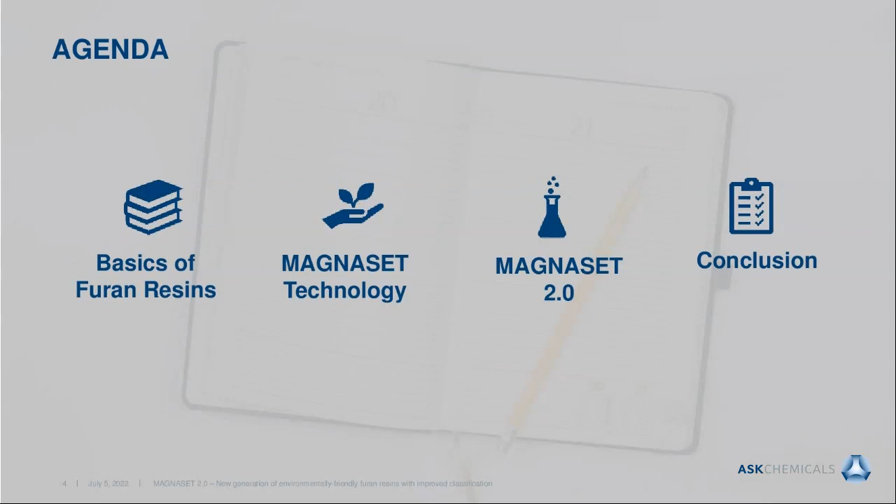Finally, the conclusion should convince you that the MAGNASET technology is an effective and powerful tool to significantly improve sustainability and work conditions. So let's jump right in. What is the no-bake binder concept?

The basic idea of this concept was the foundry's need for a dimensionally accurate binder system that did not require heat to set, to cut down on expenses and process steps and to save money. In general, the no-bake portfolio covers a wide range of different binder systems, which have been extensively studied in the past. This includes probably the most commonly used no-bake binder systems, such as furan, phenolic urethane, or alkaline phenolics, but also phenolic and alkyd oil binder systems are well known.

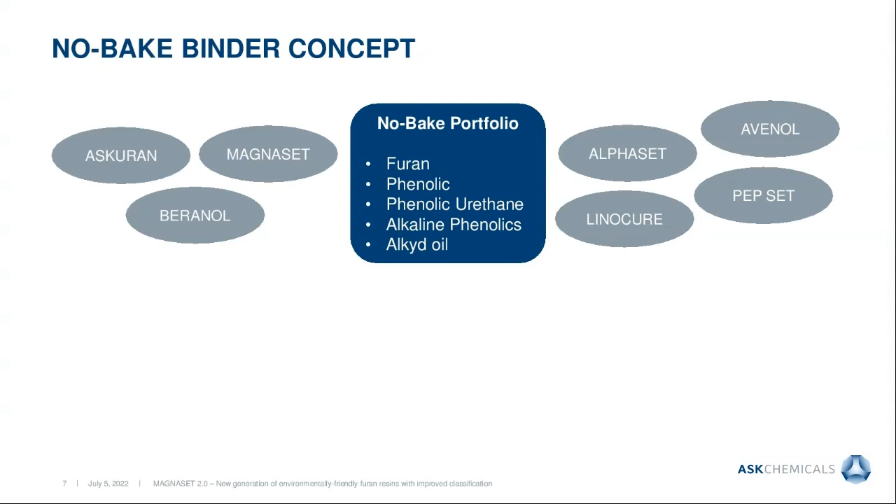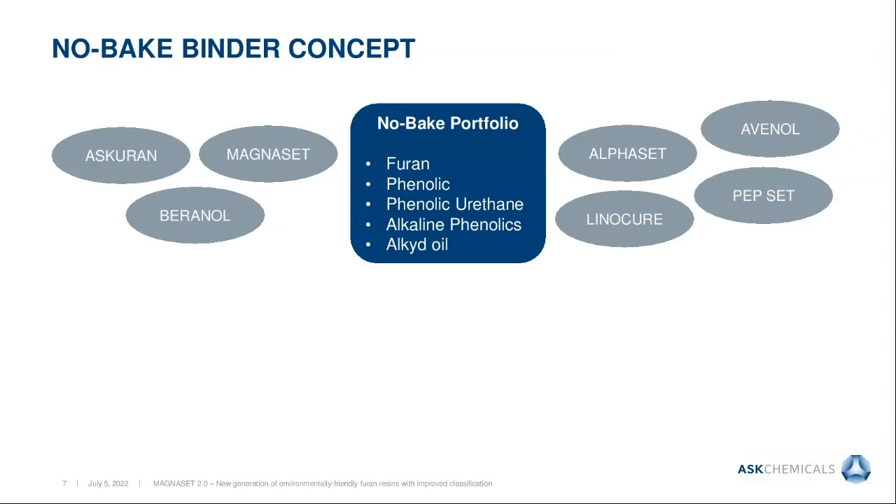ASK Chemicals has a strong background in no-bake chemistry and a huge variety of products in their portfolio, such as their well-known PEPSET binder system as an example for phenolic urethane systems, or ASKURAN as their signature furan-based product, just to give you some names and a few examples. And what do all of these systems have in common?

They are all organic systems, which means that emissions, including BTX and overall emissions, play a crucial role, and these emissions are strictly regulated by the government. Additionally, toxic raw materials such as formaldehyde, phenol, and furfuryl alcohol, which are used as building blocks, are regulated and strict threshold values are given. This affects the classification as well as the safety data sheets, and it also plays an important role affecting transport, storage, and handling of these resins. For example, the amount of residual free formaldehyde must not exceed 0.1%.

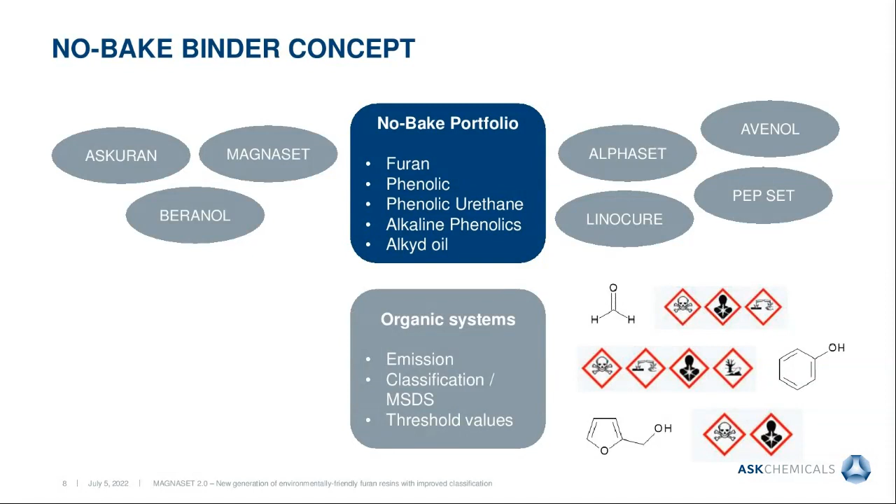For the different resins, different curing mechanisms are known, for example ester curing, isocyanate curing, or acid curing, which means that also a hardener as part 2 is needed. The respective binder hardener system and the corresponding organic structure of the hardener and the emissions resulting thereof have also been taken into account. Furthermore, if you have a hardener which features sulfur or phosphorus, this can cause casting defects which you have to take into consideration. Today, we will concentrate on acid curing systems, which includes the ASK product classes ASKURAN and MAGNASET.

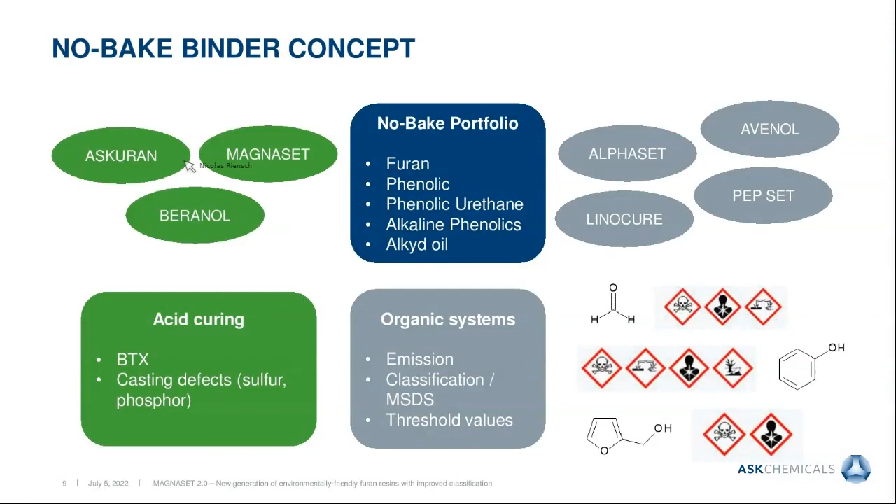In contrast to systems based on petrochemical components such as phenolic urethane or ester curing phenolic systems, furan binders are based on furfuryl alcohol, which is a readily available renewable raw material derived from agricultural waste such as corn husk or rice hulls. Due to the self-curing ability of furfuryl alcohol under acidic conditions at ambient temperature, furan binders can be described as the first true no-bake binder.

So let's take a closer look at the mechanism. The addition of the acid initiates the polymerization reaction, which proceeds under chain growth and cross-linking. The starting point of the polymerization reaction is between two furfuryl alcohol monomers to build up condensation product 1, which has a methylene bridge and still features a reactive methylol group, shown here in the orange box. Further condensation affords the suggested furan no-bake polymer 2.

In general, furan no-bake binders purely based on furfuryl alcohol show good performance in terms of environmental acceptability. But on the other hand, the produced sand cores and molds indicate a higher tendency to crack and break during casting and handling due to a lack of flexibility.

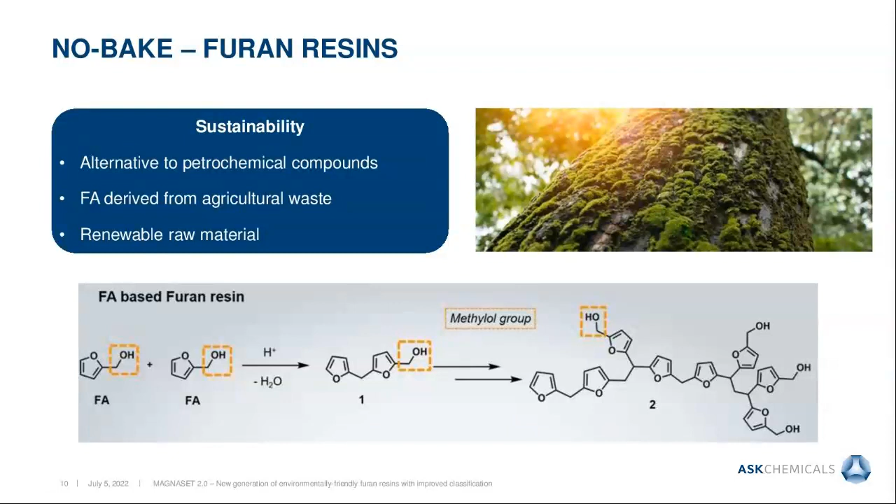The reaction scheme you can see on this slide would proceed on sand when we are combining pure furfuryl alcohol with a PTSA-based hardener, for example, under acid curing. The new furan technology, meaning ASKURAN and MAGNASET, describes modified furan resins, which can contain furan urea, furan phenolic, or in general mixed resins, as well as other additives and flexibilizers.

So now I've mentioned MAGNASET quite often, but what exactly is the MAGNASET technology? The background of the development of this technology are some of the main challenges that foundries are currently facing.

Strict environmental regulations defining emission thresholds while maintaining excellent casting quality. And of course, skyrocketing raw material prices, as well as increasing energy prices, gas prices, and delivery are also a big issue. But it is necessary to maintain the high level of performance while at the same time adjusting the resin recipes to fit the permitted threshold values.

And in this context, MAGNASET enters the stage. While conventional furan resins have a free furfuryl alcohol content of typically 50 to 95%, the MAGNASET technology is a new generation of low free furfuryl alcohol furan binder systems with a performance similar to state-of-the-art furan binders.

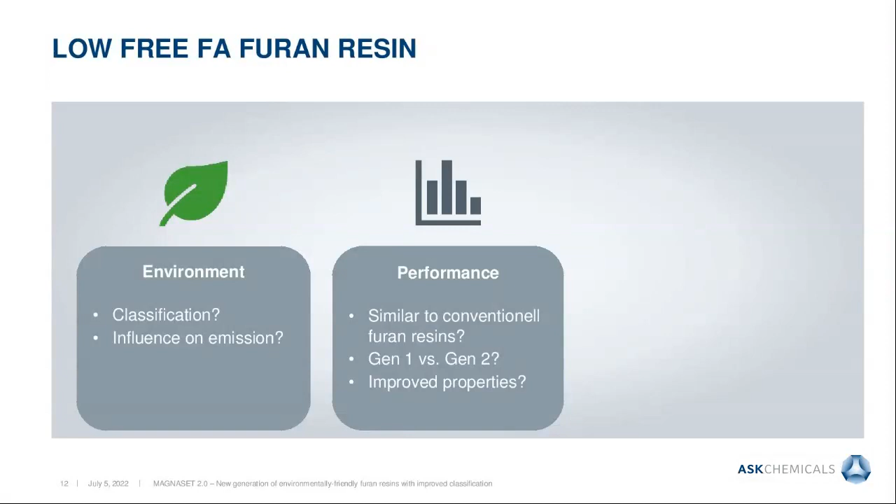On the following slides, I will talk about environmental aspects and answer the question how MAGNASET is classified and which influence on emission is given. Furthermore, comparison between conventional furan resins and the MAGNASET technology are made, also discussing results and performance of the freshly developed second MAGNASET generation. In the end, I will briefly talk about 2 case studies.

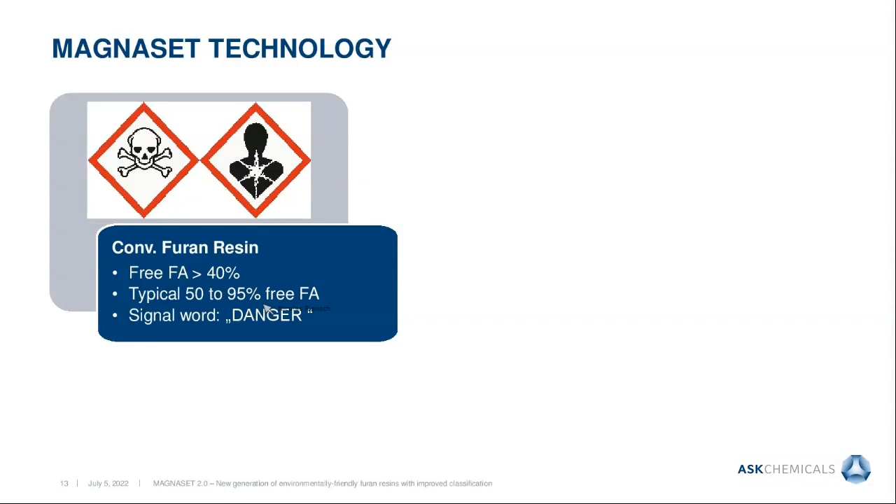So let's start with the labeling. As briefly mentioned, conventional furan resins have a free furfuryl alcohol content of more than 40%, mostly between 50 and 95%, resulting in a signal word danger and the labeling with skull and crossbone. For MAGNASET resins, the free furfuryl alcohol content is fixed to below 40% by definition.

And this reduction of the FA content leads to a milder classification, which you can see on the right side. The signal word changes from danger to warning, and the hazard symbols are now skull and crossbone free.

The basic idea is that the MAGNASET resins have an equal performance to the conventional furan resins, despite having a significantly lower free furfuryl alcohol content. And this again affects transport and handling and offers an emission reduction potential.

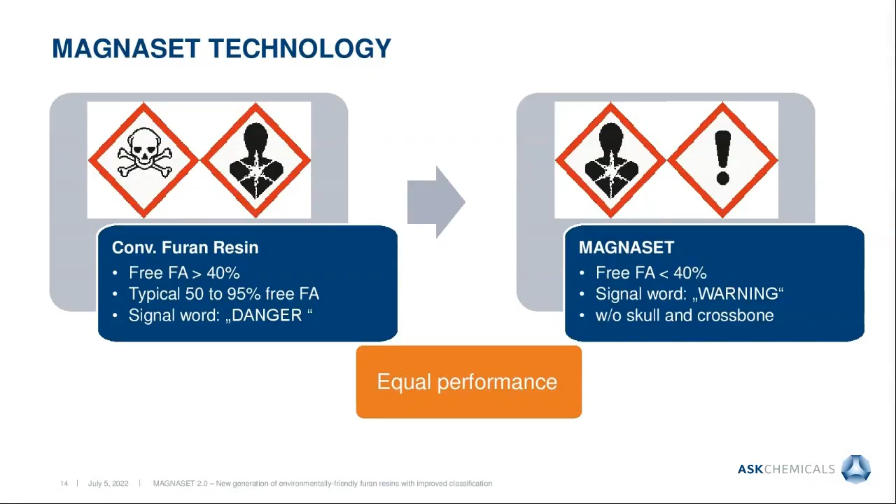So let's take a closer look at the hazard labeling. On this slide, you can see the classification of acute toxicity of category 4, 3, and 2, and the corresponding hazard symbols and threshold values.

Category 4, which is the lowest category of toxicity, is labeled without skull and crossbone, and this is the case for all MAGNASET resins. For the classification of the toxicity, you need the acute toxicity estimate values, the ATE values, or you can relate on the LD50 values given in this example for oral, dermal, or inhalative exposure.

You can find such values in Chapter 11 of the safety data sheets, and those values are determined or calculated for every resin, so also for all MAGNASET resins. And these values can be used to define the FA threshold values in the mixture.

In general, both LD50 and ATE values are used to categorize the resin into the toxic categories. And considering the correlation of toxic category for all exposure classes with the free FA content, you have to orientate at the lowest given value to get the mildest classification. So in this case, it's below 40%.

In category 4, the hazard statements are harmful if swallowed, in contact with skin, or if inhaled. And these phrases change to the phrase toxic when the FA concentration is above the threshold value of 40%, which you can see here. So these sentences are for category 3 resin.

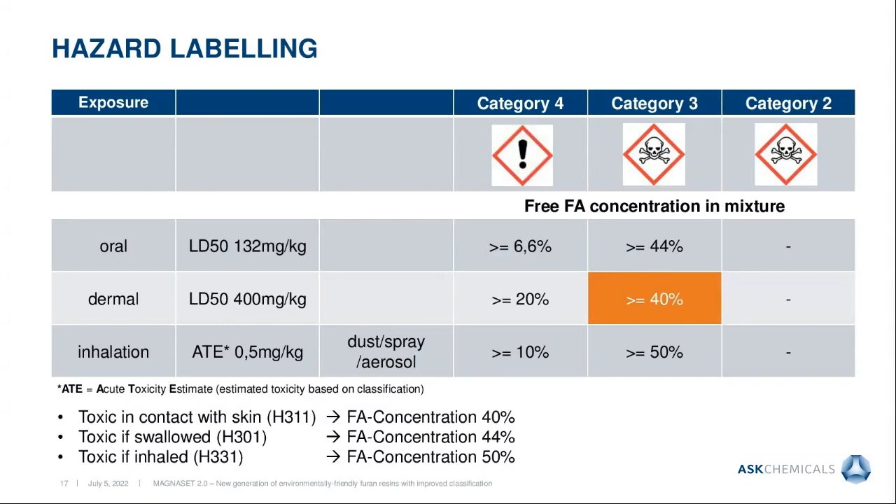In comparison to conventional furan resins, MAGNASET has a milder classification without the skull and crossbone symbol.

But what about emissions? First, we have to think about at which steps during the whole foundry process emissions can occur. On one hand, we have emissions as a result of evaporation and reaction products, including alcohol, formaldehyde, and other volatile organic compounds, which predominantly occur during mixing, forming, and storage.

They use binder, hardener, and sand. There's a difference between fresh sand and reclaimed sand, which play an important role during mixing and forming.

On the other hand, we have emissions as a result of pyrolysis and decomposition, which includes BTX, NOx, and SOx emissions, as well as phenol and formaldehyde, which occur during casting, cooling, and removal of the cast.

In general, the left side relates more to worker health and directly affects the workers in contact with the volatile organic compounds, while the right side also includes emissions for the environment and direct neighborhood.

Another important aspect for worker safety and emission detection is whether sufficient extraction of emissions is given—for example, if the mixing and forming process is connected to an exhaust line. In all cases, a sufficient extraction and purification unit should be used.

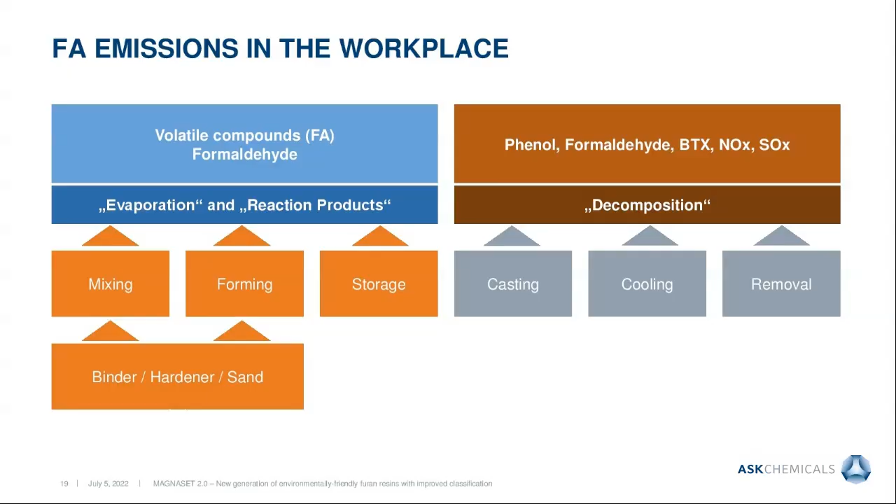During mixing and forming, the binder, hardener, and sand used are responsible for emission formation. Concerning our MAGNASET resins, we have a calculated, significantly reduced amount of volatile free furfuryl alcohol compared to conventional furan resins.

If we compare a conventional furan resin having up to 85% free furfuryl alcohol with our MAGNASET resin at just below 40% free furfuryl alcohol, we have an emission reduction potential of up to 55%, using the same hardener and sand, with MAGNASET as a direct drop-in replacement.

However, this value also depends on environmental conditions, including whether the molding line is connected to an exhaust line, or the state of the ventilation system and change of air.

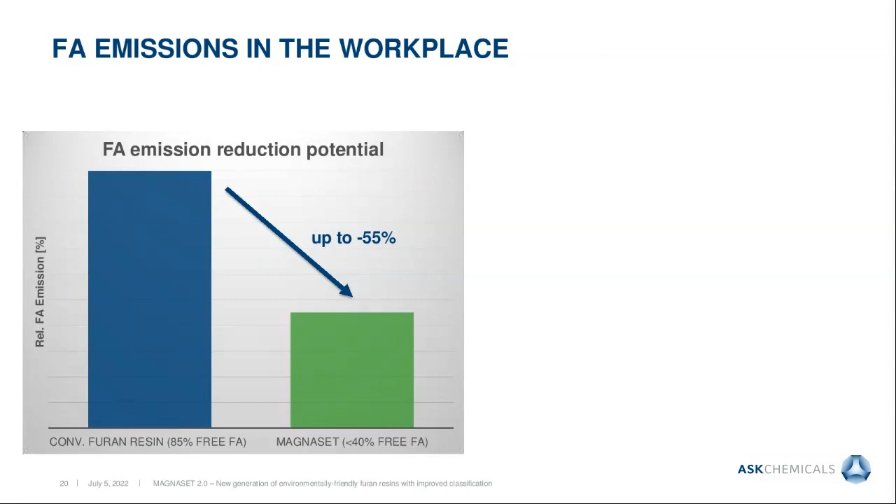Furthermore, we investigated the occurring formaldehyde emissions during mixing via photometric analysis under lab conditions, comparing conventional furan resins with resins based on the first and second MAGNASET generations.

To our delight, we found we were able to reduce the amount of occurring formaldehyde emissions during mixing by 39% when changing from conventional furan resins to the MAGNASET Gen 1 resin.

More recent results have shown that our freshly developed MAGNASET Generation 2 resin has the potential to further lower formaldehyde emissions by up to 64% in total, again compared to the conventional furan resin.

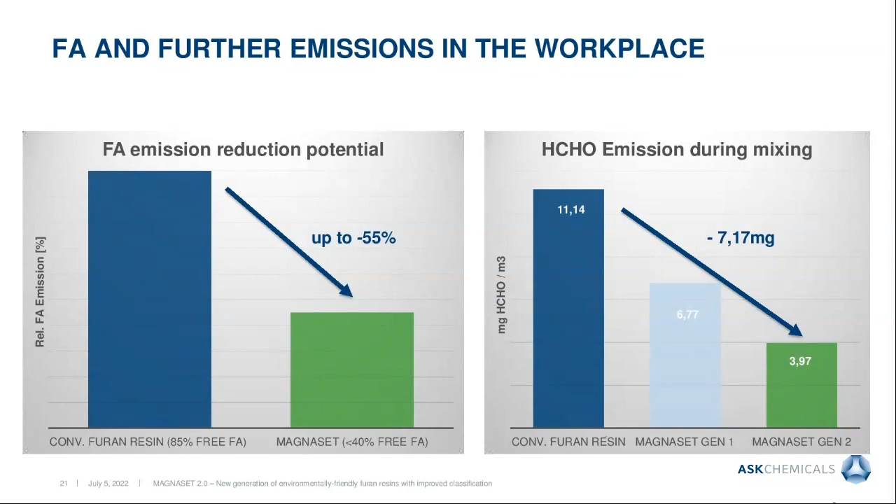On the previous slides, I've talked about the MAGNASET technology and corresponding resins in general. On the following slides, I would like to point out some differences between the first and second MAGNASET generation.

The reduced formaldehyde content, as well as the high reactivity of the first MAGNASET generation resins, cause a slightly lower storage stability compared to conventional furan resins. This is one topic we wanted to address and improve during the development of the second MAGNASET generation.

Indeed, lab application tests with our new MAGNASET Gen 2 products indicate an improved storage stability compared to the first MAGNASET generation.

As you can see, the viscosity values of the second generation resin, shown in the blue line, remain at a constant level, while the values of the first generation resin slowly increase during storage at ambient temperature over an elongated period of time.

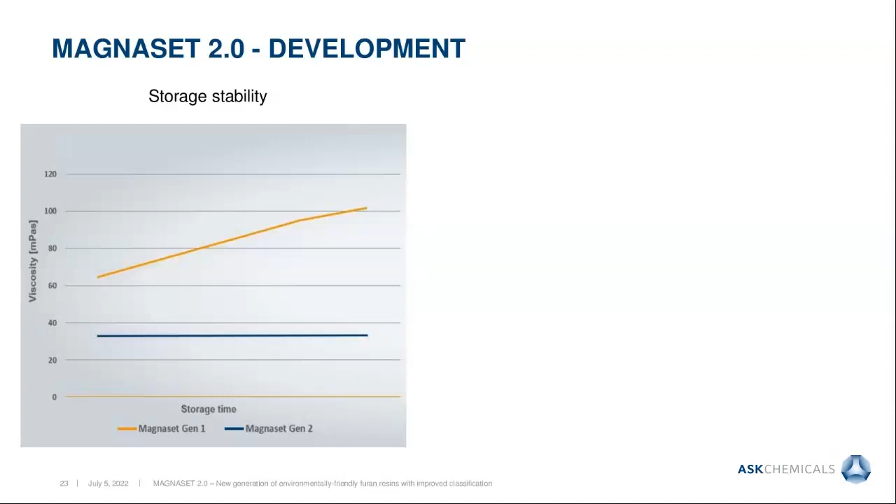Additionally, I want to highlight the ease of adaptation of the MAGNASET technology to existing systems. You can use the same pipes and connections, the same amount of binder and hardener, the same mixer, the same sand, and there's also high tolerance to the reclaimed sand used. This means you can use MAGNASET resins as a drop-in replacement.

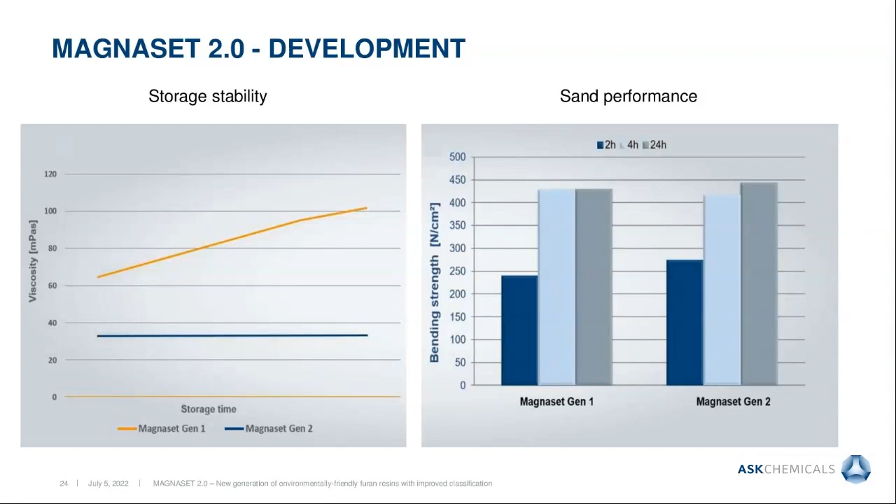So let's talk about our MAGNASET resins. In our portfolio, there's a series of resins with tailored properties suitable for all types of casting and customer requests, providing good molding properties and excellent casting surfaces. Today, I would like to highlight 3 types of MAGNASET resin.

Our phenol-free MAGNASET Gen 2 resin has a very low free formaldehyde content, below 0.1%, and a medium to high reactivity, which makes it an all-rounder for all types of casting. Furthermore, we are offering a cost-efficient mixed resin with a free phenol content below 1%, and also a free formaldehyde content below 0.1%, with a performance similar to phenol-free resins.

Last but not least, we have also developed a steel variation featuring a low water and nitrogen content. And as you can see on the left, in all cases, good strength development is obtained with high bending strength after 2 hours in blue, 4 hours in orange, and 24 hours in gray.

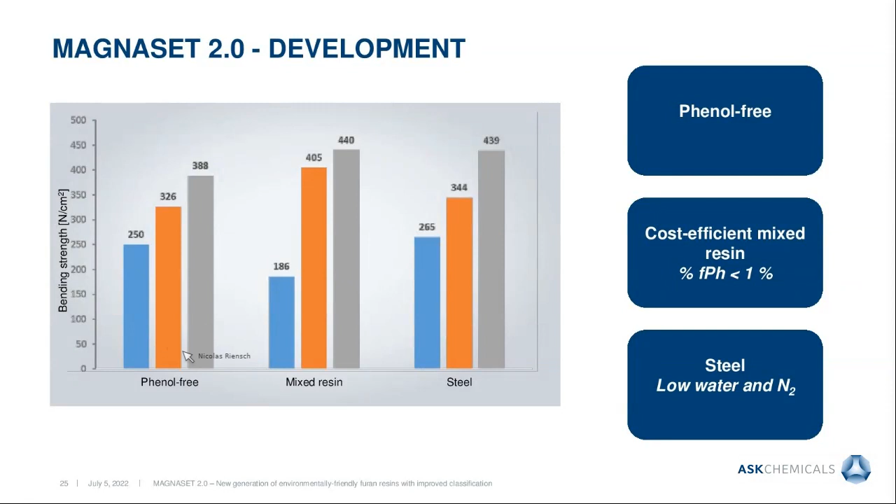So 2 slides ago, I mentioned the ease of adaptation and a high tolerance towards reclaimed sand. On this slide, you can see a comparison of the reactivity on the left side and sand performance and strength development on the right side on fresh sand in comparison to reclaimed sand.

When we are using reclaimed sand, the reactivity of a selected MAGNASET Gen 2 resin example is faster as compared to fresh sand, which you can see here. It's 13 minutes versus 6, and 62 minutes versus 30. This is expected due to a lower pH value and in general a more acidic sand.

The bending strength after 4 hours and 24 hours are lower, but still on a high level for reclaimed sand. To achieve higher strengths or fine-tune the performance, a good strategy is to add fresh sand in a certain amount, maybe 5 to 10% to the reclaimed sand, or even higher, depending on your requirements.

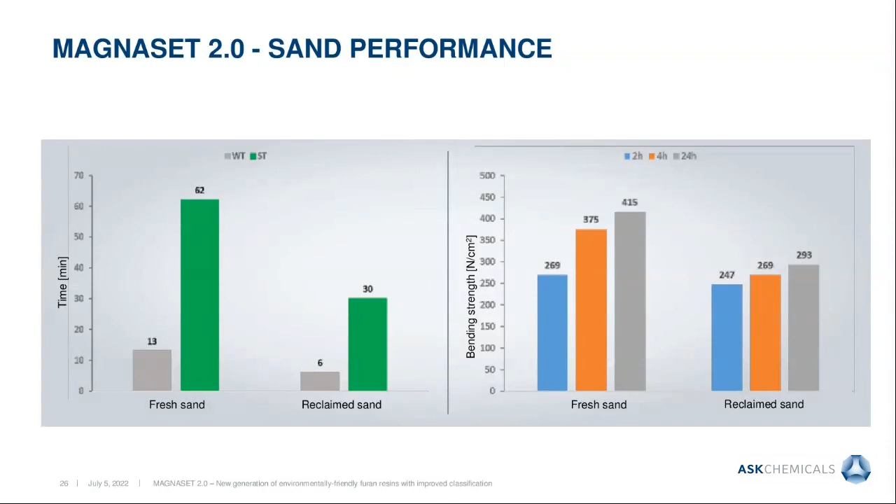The MAGNASET resins indicate a good compatibility with different hardeners, and the reactivity can be easily adjusted and tailored by the respective catalyst choice. On this slide, you can see ultrasonic irradiation measurements of MAGNASET Gen 2 resins in combination with different hardeners on fresh sand. The ultrasonic irradiation method is a method to determine the work and strip time of reaction systems and gives you the reactivity graphically in direct comparison.

For the measurements, you combine sand, resin, and hardener in the blue block, which you can see here, which is connected to a transmitter and receiver. An impulse is generated, and the time for the impulse to travel through the sand-binder-hardener mixture is measured. With increasing level of curing, the ultrasonic velocity increases. So the stronger the increase of the slope at the beginning, the faster is the reaction system, which can be related to the work time.

This means that the red line corresponds to the most reactive, and the brown line corresponds to the slowest system. As you can see, the MAGNASET Gen 2 resins can be used with all types of different hardeners, enabling fine-tuning of the desired reactivity. Another benefit of the high reactivity is that sulfur-reduced hardeners of the hardener RS series can be used, which lead to lower overall emissions by reduction of SOx emissions, and also to higher casting quality by avoiding casting defects.

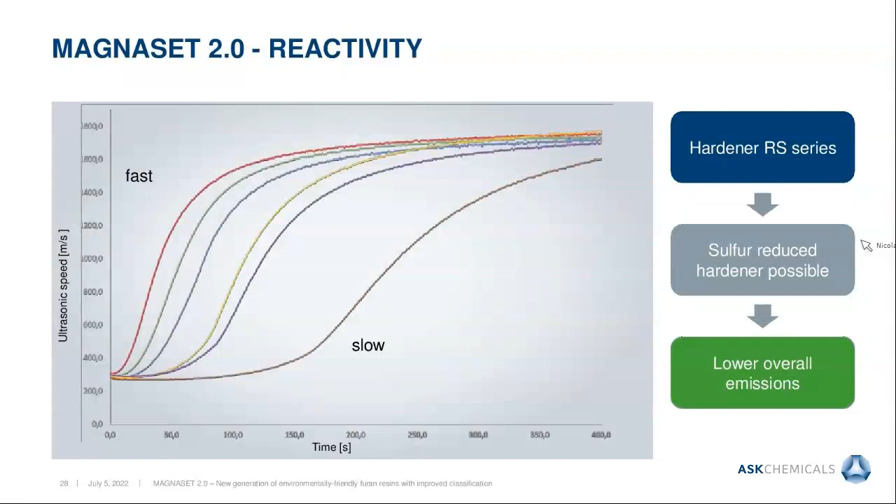The determination of work and strip times gives you more concrete evidence for the reactivity. On the previous slide, I talked about how reactivity can be easily adjusted by use of the respective hardener. On this slide, you can see the reactivity of a selected binder-hardener combination by means of work and strip time for a mixture comprised of reclaimed sand, with a lower pH value, loss on ignition of 3.4%, standard parameters of 1% binder of a MAGNASET Gen 2 resin and 0.4% hardener at 20 degrees with a relative humidity of 40%.

As you can see, we were able to tailor the reactivity from fast to standard over medium to slow, and we can also use sulfur-reduced hardeners in different reactivity types, so more standard or a reduced sulfur system in slow, in which the strip time amounts to 182 minutes. In comparison, our fastest binder-hardener system has a work time of 3 minutes and a strip time of 22 minutes, which can potentially be used for serial production, while elongated work and strip times also give rise to potential applications for larger size castings.

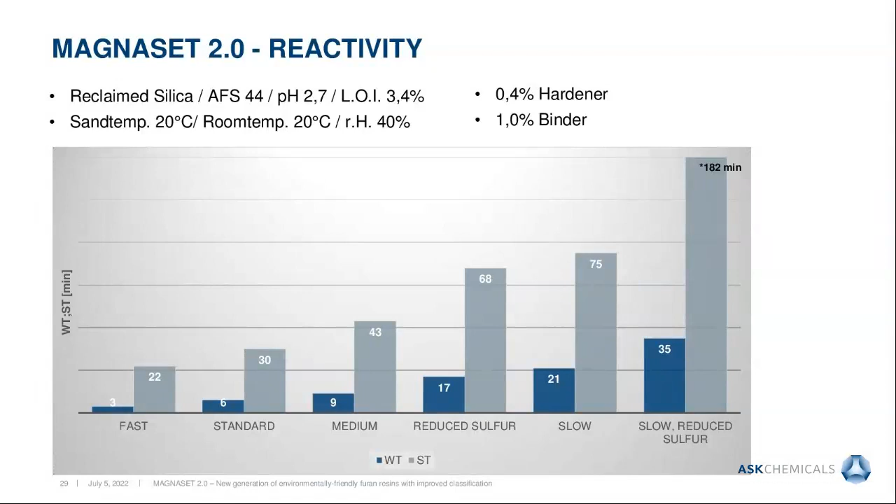Before the summary and conclusion, I would like to talk about 2 case studies of foundries using our new resins and discuss the different motivations for their decisions.

The first case study is about an aluminum foundry which used a furan resin with a free furfuryl alcohol content of more than 75%. The focus and motivation is on sustainability and worker health. They basically wanted to use the greenest furan resin available in our portfolio.

What I've shown and talked about on previous slides is that by changing from conventional furan resins to MAGNASET resins, you have the potential reduction of formaldehyde emissions, which directly affects the workers working with your molds. So by switching to MAGNASET Gen 2 resins, you should generate high acceptance from your workforce. Back to the example, after switching the resins, they obtained similar performance, affording a high casting quality for complex molds in small to medium casting sizes.

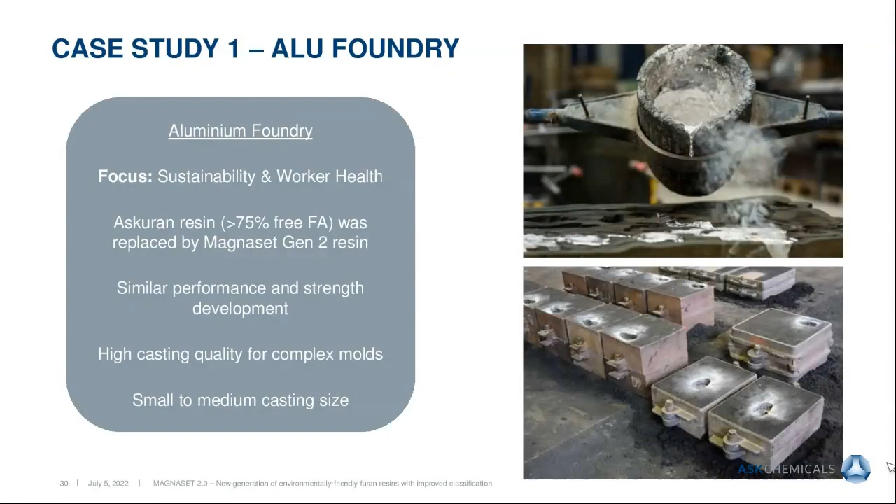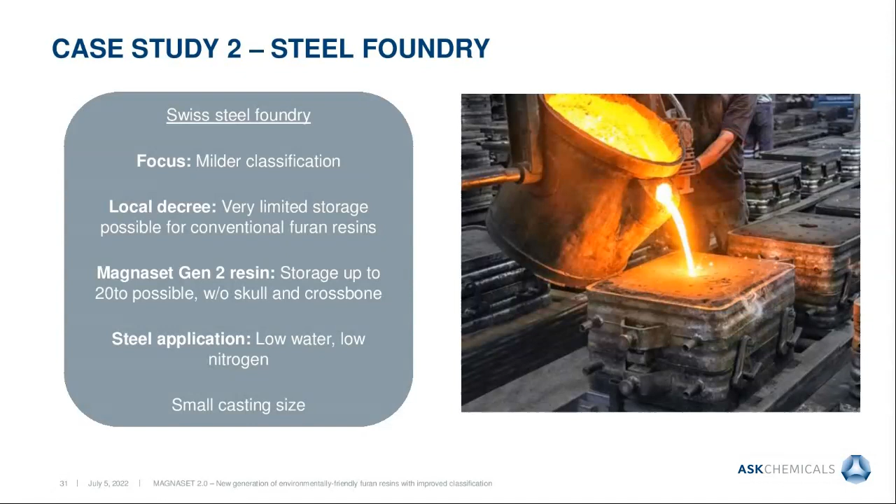Of course, if you want a higher production throughput, or want to produce more, this is not suitable. By using our MAGNASET Gen 2 resins, they were allowed to store up to 20 tons of the product, with the added benefit of labeling without skull and crossbones. For their steel applications, we designed a resin featuring low water and low nitrogen content, which they use for small casting sizes and for the production of pumps.

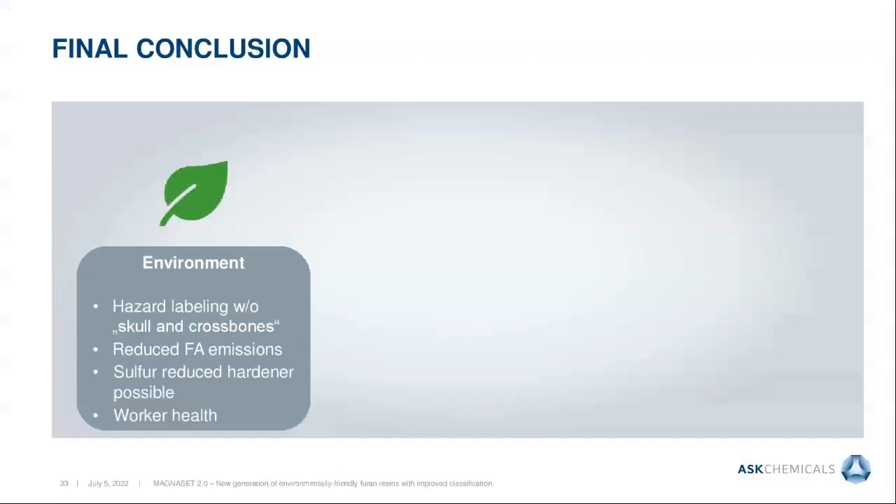Okay, let's sum up and make the point. I hope I was able to convince you that the MAGNASET technology is a really interesting system from an environmental point of view. The MAGNASET technology combines the advantages of a milder classification without the skull and crossbones with reduced furfuryl alcohol and formaldehyde emissions.

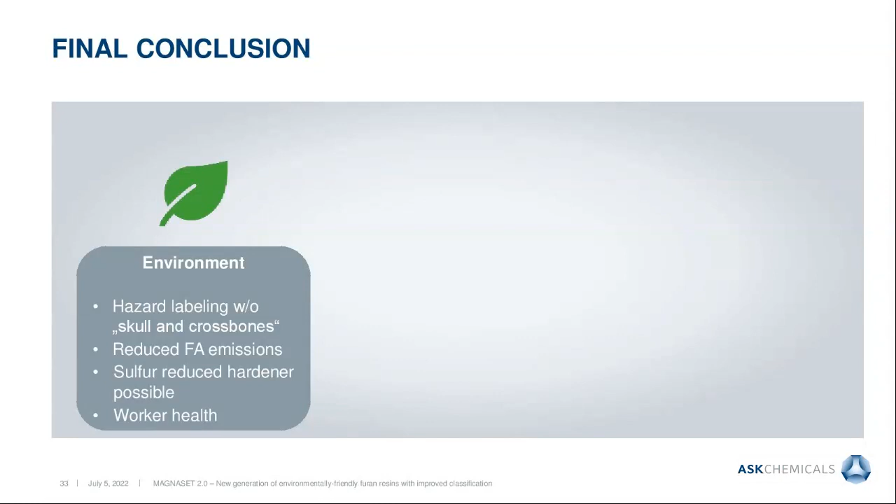Furthermore, due to the high reactivity and flexibility of the system, the hardener RS series can be used to lower overall emissions. Both the first and second MAGNASET generation have a performance similar to conventional furan resins, and the freshly developed second generation additionally shows lower viscosity as well as enhanced storage stability compared to both conventional and first generation MAGNASET.

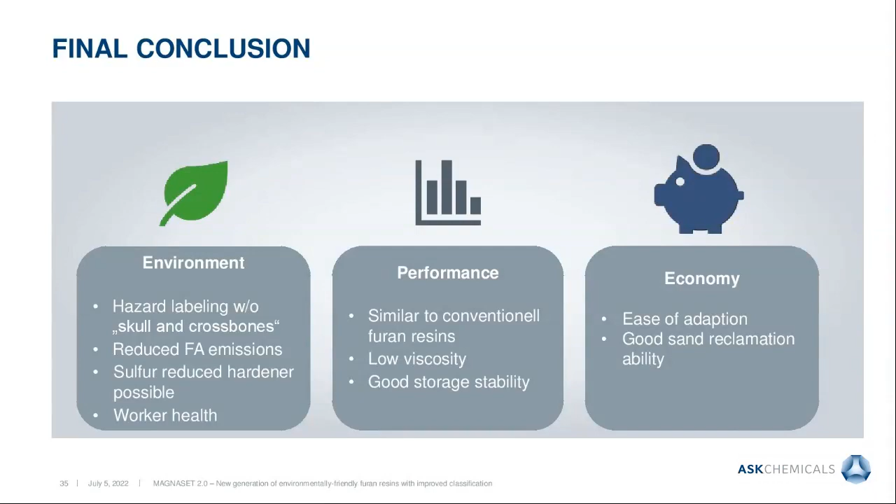Last but not least, I want to highlight the ease of adaptation according to the motto plug and play, as well as the good sand reclamation ability, which makes the MAGNASET resins really interesting from an economic point of view. Thank you very much for your kind attention.